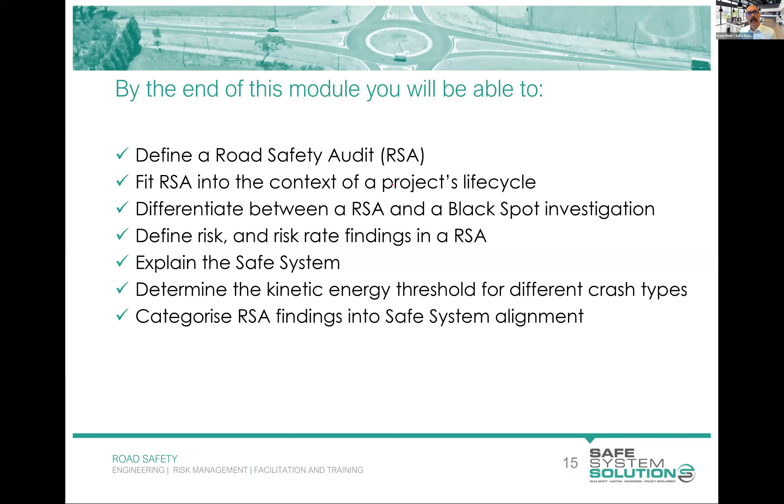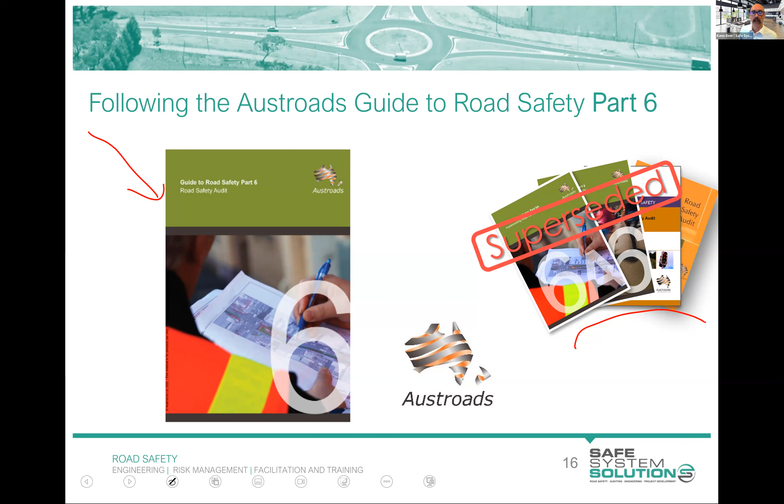I've just come back from Canada, where I was running this training course for the Canadians, and we're very much following the same process across North America, Europe, Middle East, Australia, and Asia. So it's fairly consistent. But overall, for the course as a whole, we are looking at the process of road safety auditing.

Okay, there's no possible way in our 5 modules we can talk about all of the things out there on the roads and the streets that you might identify that you've got a concern with as a road safety auditor. We just simply don't have enough time. And in fact, that's a lifelong, career-long exercise of continuing to learn and identify things and read things and see things and work with others. So we're going to focus in on the process of road safety auditing and ensure that you have basic skills in how to undertake this process of road safety auditing. We're going to ensure that you look at things through a safe system lens. I'll explain what that means shortly.

But then we're going to present examples of common issues in road safety auditing. And this is through my 20 plus years of road safety auditing and colleagues and things that we see coming up over and over again. Now, admittedly, we've managed to do some good work in changing standards and guidelines and the like to rectify these. If you're seeing the same thing coming up over and over again, you'd want to try to change industry on that. But there are common things, common themes that come up. So I'll use lots of those examples.

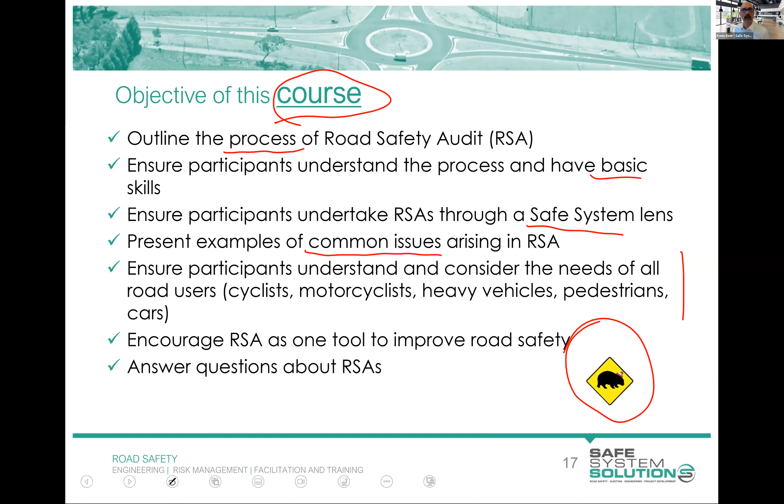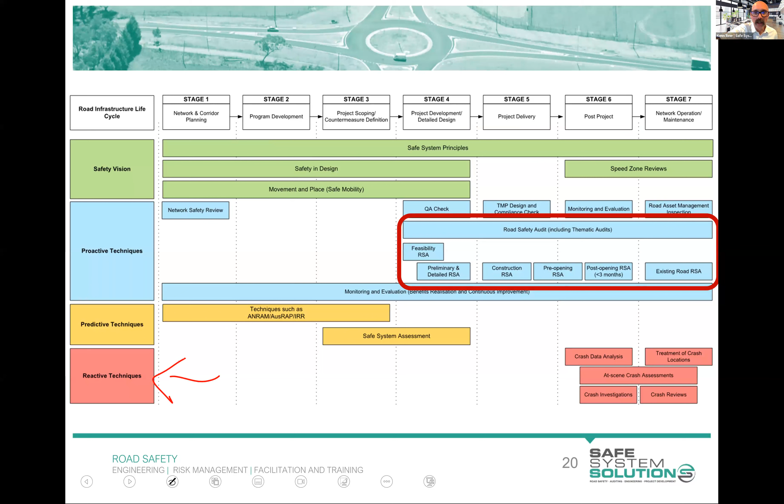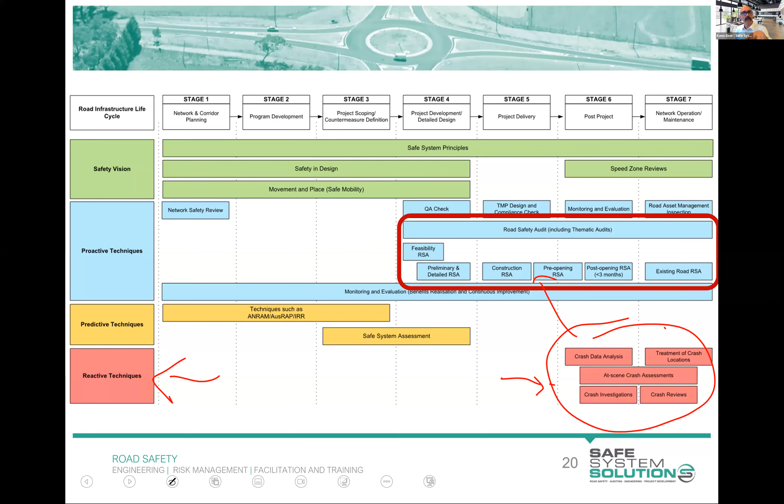If you've got a crash history and you're really doing in-depth analysis of the crashes that have happened and why they've happened, you're down here in reactive techniques and you're doing either black spot investigations or treatment of crash locations, these sort of things. Now, these are complementary to this. And in fact, we learned a lot of the things as an industry in road safety auditing from crash analysis, but those are two different beasts in their own right. I'll explain that a little bit more, but that's a common misconception of road safety auditing, that we're just looking at the crashes that have happened and trying to change the road environment based on the crashes.

Another common misunderstanding of road safety audits is to think that it is a check against the standards and guidelines. And that's not the case. So meeting all of the standards and guidelines of your jurisdiction does not guarantee safety. And there's many reasons for that. Sometimes the standards and guidelines are very old and they haven't kept up to date with current vehicle fleets, the way the roads are being used.

Second one is that standards and guidelines very often have traded off safety. They have to. They've got all sorts of things going on in the development of a standard or a guideline. They're thinking about cost and they're thinking about movement of vehicles, so the operation of your network. And sometimes safety hasn't got the prominence we wanted it to have. Then we've got the application of the standards in particular contexts. Sometimes a standard has never been thought about in a particular context, but it's being applied in that context. And another one is that sometimes standards combined create unsafe scenarios. On their own, they're fine, but you pull them together and it creates an unsafe situation.

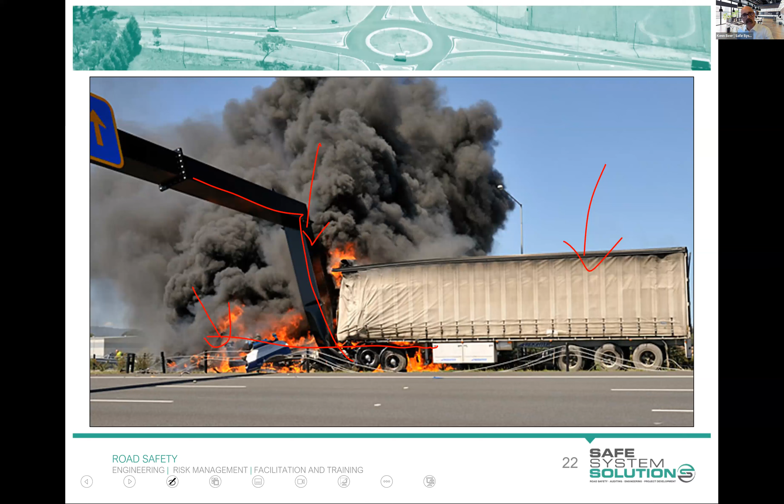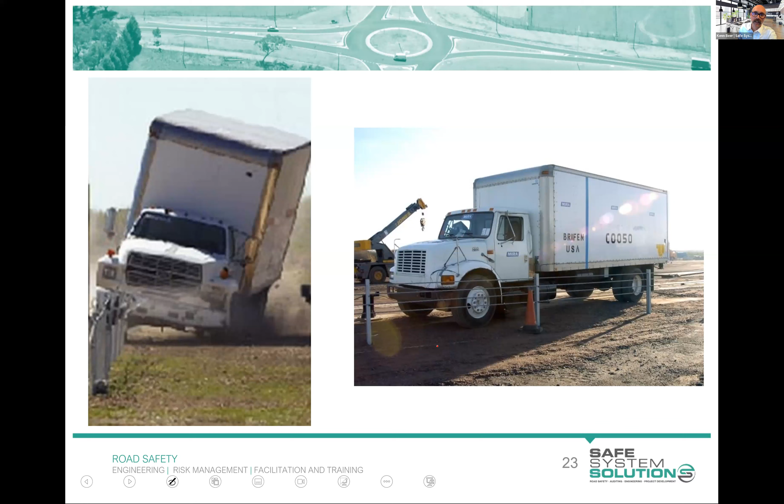So that is the test vehicle under a MASH test level 4 test, 10-ton truck, and the barrier needs to contain it, and there's a whole lot of other parameters in the MASH testing, the Manual for Assessing Safety Hardware. But that's for another course, a barriers course, in-depth stuff. As auditors, we want to know and think about this, and I'll integrate some of it in. But don't worry, you're not expected to be an absolute barrier expert in order to be a road safety auditor at this stage.

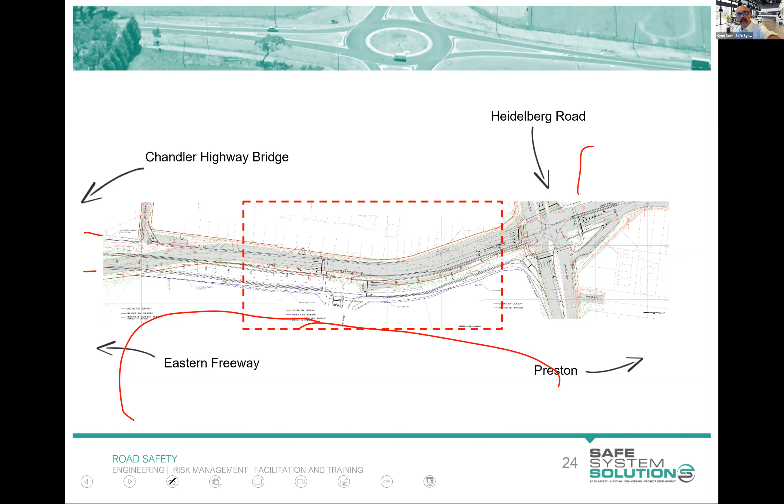Let me give another example, and I'm going to stick in Victoria here. This is a new bit of road that's being developed, a duplicated road. So they're duplicating it. And there's a big new subdivision in here, huge subdivision, massive lot of apartments, shopping center area. We've got an existing intersection up here, and I'm going to zoom in on this little bit that I've highlighted, okay? So this is a new road. It does not exist yet. Well, it actually does now, but back then when it was a plan, it didn't exist.

And you can see here, I've drawn a little car. So this car, imagine it's traveling along at 65 kilometers an hour. It's a 60 zone, but they're traveling a little faster, as many people do. We need to be thinking and factoring that in. So they're in their lane, happily continuing on straight, and whoa, I'm in a right turn lane. Now, this is termed a trap lane.

Now, this is a common thing we'll pick up in road safety audits. I really would like to find out who coined the term trap lane, because I'll give them a prize. That's an awesome name for this, because it's exactly what happens. You're driving along and all of a sudden you're trapped. You don't want to turn, but your lane turned into a turn lane.

Now we absolutely know from mountains of data and evidence that we're going to see an increase in rear end and sideswipe crashes in this location, because people are going to try and get out of that lane. They don't want to be there, and they're going to make that last minute move, and there'll be vehicles banking up.

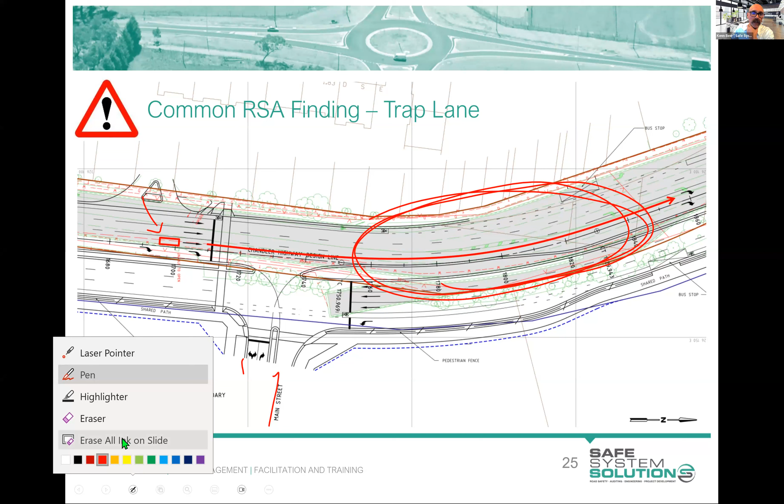So then you can provide recommendations, everything from removing the trap lane, which is what we want to do, but potentially providing them with other things that may lessen the risk if they absolutely have to keep it, such as some really good advanced warning, alterations in the pavement markings, could be gantry signage, all sorts of ways to try to lessen this risk if they can't remove it.

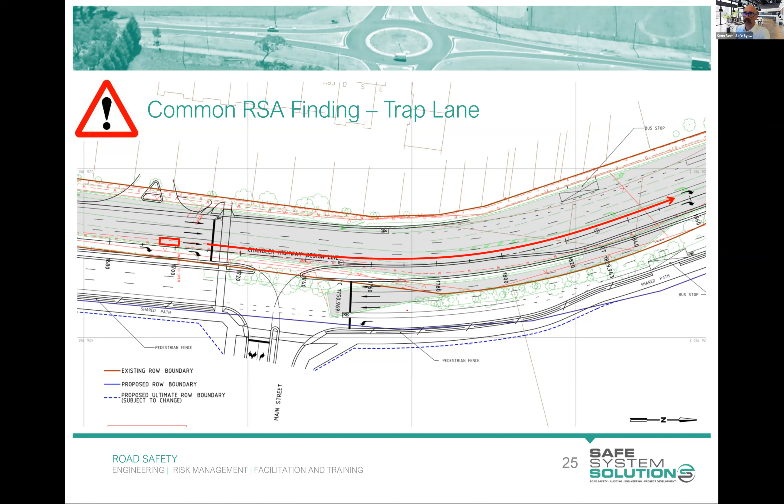But I'm going to get you to do a little bit of something now. I'm going to play this little bit of dash cam footage, and there's going to be a crash. Now, remember, road safety auditing is not crash investigation, but there's stuff we can learn from crashes to try to make sure people don't build them in the future, or if there are intersections like this, that maybe we can lessen the risk. What I want you to do is watch this a few times, and then type into the chat what factors in the built road environment here, in the infrastructure, may have contributed to this crash happening. Don't talk about the driver's behavior, all right? Talk about the infrastructure and how everything's been designed and built, okay?

So I'm going to play this video. Hopefully it plays. No, it's not going to play. We'll try it that way. Okay. I'm going to come back to this, and we'll do this little exercise after the break because something's gone a little astray there. Unless, Loretta, you have the slides up. You probably don't. Don't worry about it. We will come back to this.

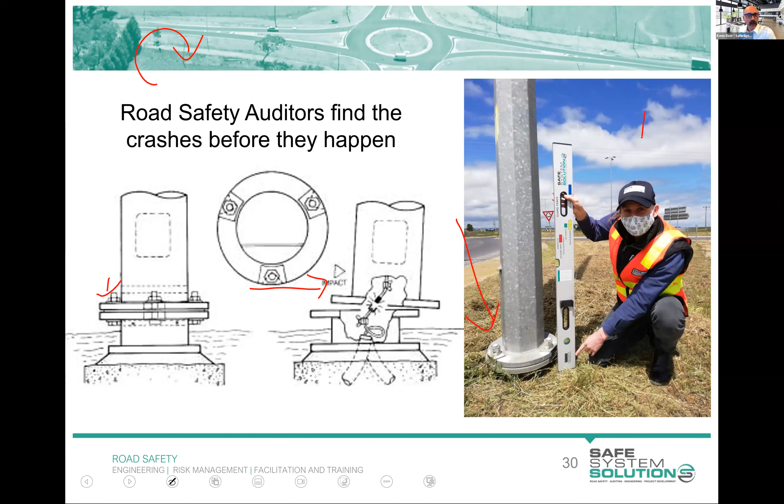Now, as road safety, so you can see one here, and you can see one of our senior road safety auditors having a look at it, which I'll come back to. But as a road safety auditor, you might be given a design like this, which is planning to put in some new lighting at this intersection. And what your role would be is to have a look at the lighting and whether it's going to cause any issues, any see-through effects, any changes to or get in people's eyes, like a driver will be blinded by things.

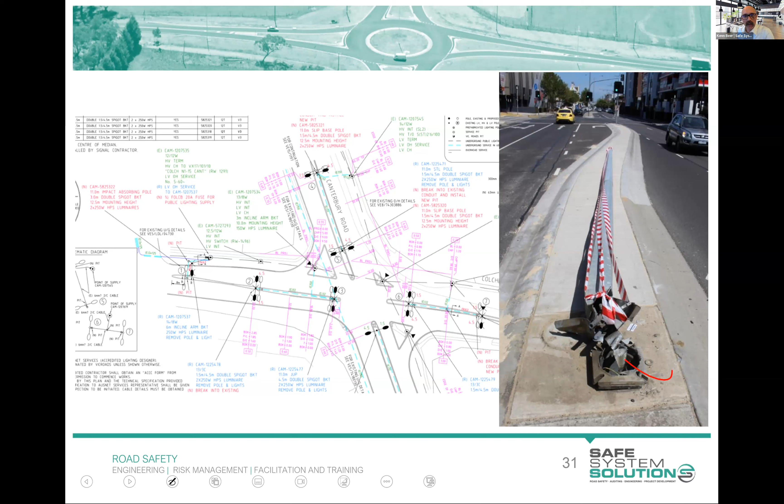You might be thinking about that, but you'd also be thinking about, well, what type of poles are they using, and are they appropriate? And that will be listed in the design. So you're imagining the future and saying, well, what are they going to build? And you can see there's a slip base pole that was struck, and I think it was struck onto the carriageway, and then it was pulled around onto the island there while waiting to be fixed.

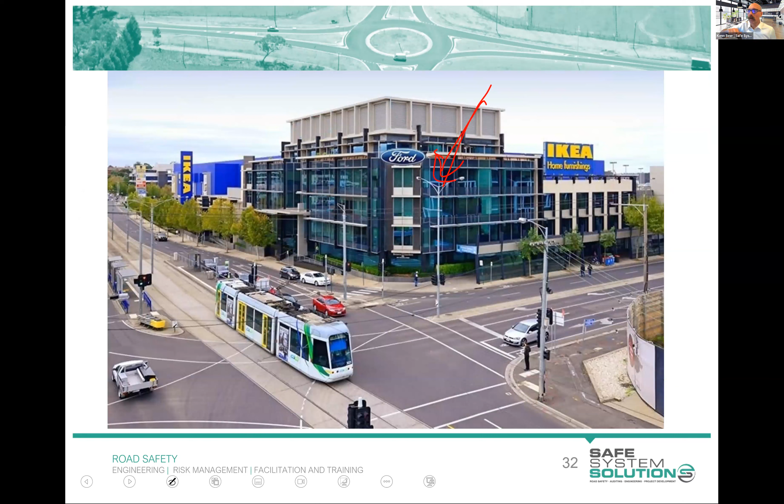But let's imagine if we had the design of this intersection here. And you saw in the design, they were planning to make that one a slip base pole. Okay. They said, yep, we're going to make that a slip base pole. What do you think, and put it into the chat, maybe some of the issues if that was a slip base pole? Give it a second here. Okay, here we go.

Fall on the tram tracks, power lines, VRUs on footpath, other vehicles, tram lines, pole. Okay, this is good. We're beautifully now thinking about it falling onto different places, and that's important. Our big concerns usually on falling light poles and the like is predominantly around pedestrian areas and overhead power lines and tram lines and the like. Falling onto other vehicles, we do think about. They're usually not heavy enough to bash through, but it's not something we ideally like, that's for sure. So that's another one to have a think about.

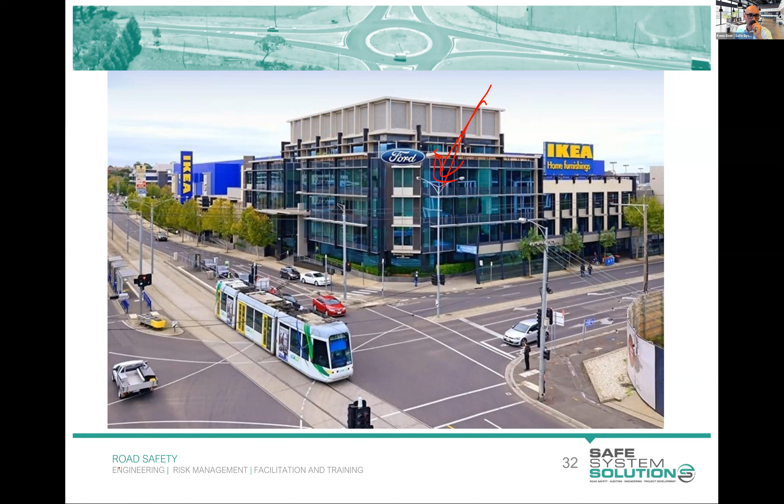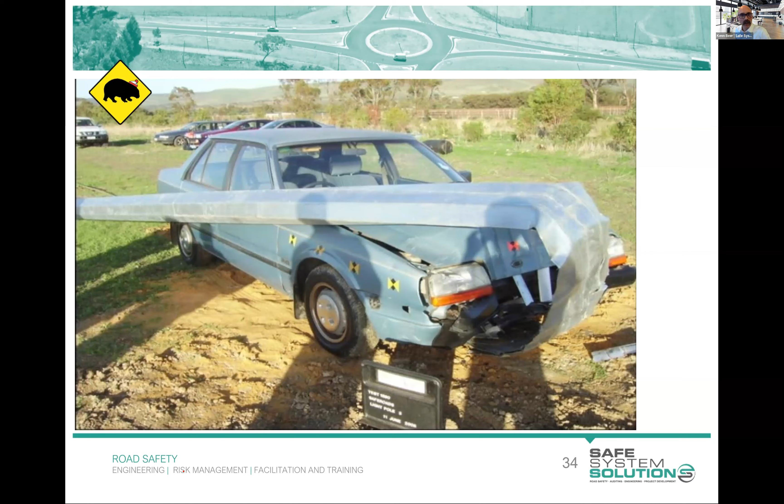But our role as a road safety auditor is to really think, okay, if we've got the design, where are these going to fall? Should they be frangible poles? Should they be slip-based? Should they be impact-absorbing poles? And where will they fall?

Now, in the PDFs of the slides for this course, which you get from the learning management system if you want to, you'll see some of these little "click here for a safe system snippet" links. That's just a little bit more information if you want to delve into it and have a look at it. We've usually got some videos of vehicles crashing into slip-base poles or whatever topic we're talking about. So you can have a look at that.

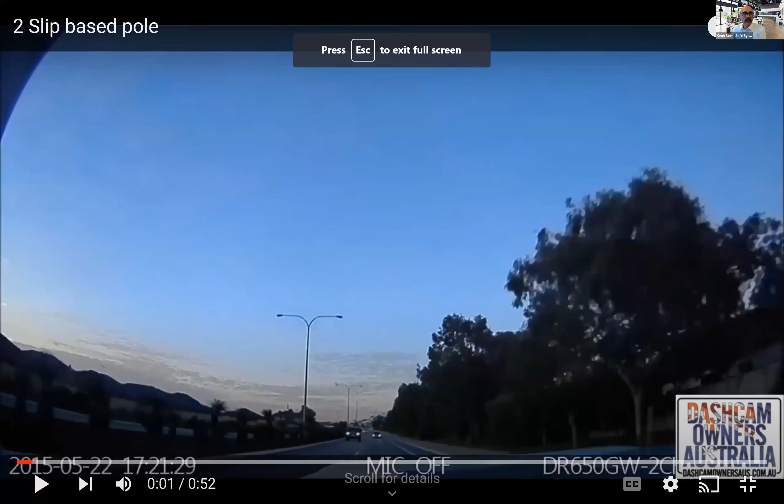Now, Loretta has kindly passed on to me the video. So I'm going to drag this in here. So hopefully, Loretta, now you're seeing the video?

Yes. Okay. I'm going to play this, and I want you thinking about characteristics of the road environment that may have contributed to this crash happening. And I'll play it a few times. So we're seeing the back of the dash cam here, and then we'll jump to the forward dash cam in a second. So keep it to the characteristics of the road environment.

Okay, I'm going to play it again, and I'm seeing some ideas come in. So what are the characteristics of the road environment? The design, the layout of this intersection, the signs, the lines, any other things you can think about, pop them in, and we'll have a chat about those. So we've talked about the frangibility of the pole already.

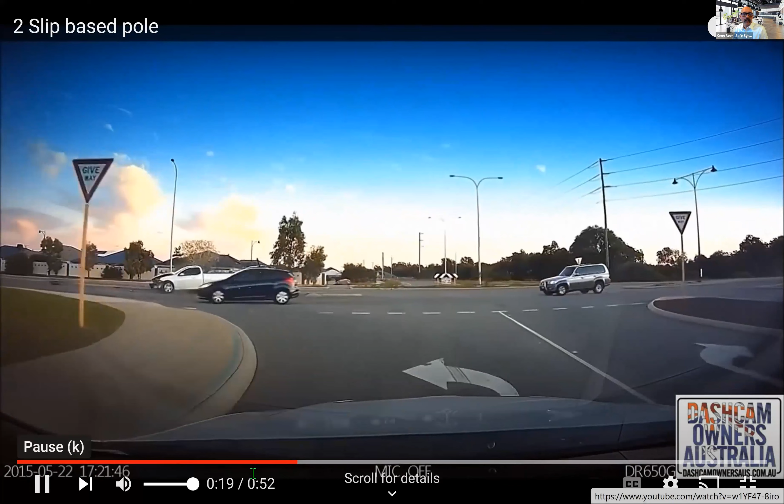Okay, so I'm seeing lots of good stuff come in here. This is excellent. Let me just start to have a look at what we're saying here. Okay. So we've got some people talking about, is there appropriate advance warning signage that there is an intersection coming up? And that's good. We want to make sure people are very alert to what they're approaching and what they have to do.

There seems to be a bit of confusion as to what intersection form this is. Is this a roundabout? Is it not? It's not a roundabout, actually. But if you're confused by that, odds on some drivers will be as well. Always hard to do any of this from a video like this. You want to be out on the site and really feel it yourself. And that's why part of road safety auditing is that we always go to the site.

But what we've got there now, people are talking about the location of give way signs. Where is it located? Is it hidden by other signs? That's another good one. Donnie has popped in there see-through effect. I'm going to give Donnie a prize there. The see-through effect is an interesting one, and that's the idea that this vehicle may have thought the road continued on unabated, that they didn't have to give way.

What are some of the contributing factors in the road environment that may influence the chance of a crash? And then we talked about the hitting of poles. Well, that's how bad the crash will be as an outcome. Is this going to be a minor issue, or is it going to be a big issue? So thank you. And this is a great group, Loretta, in the sense that lots of input and lots of good ideas. And already I can see lots of people who are already thinking like road safety auditors, because all of the things I was seeing in there are things you would want to be considering as an auditor if you saw an intersection that has that potential see-through effect.

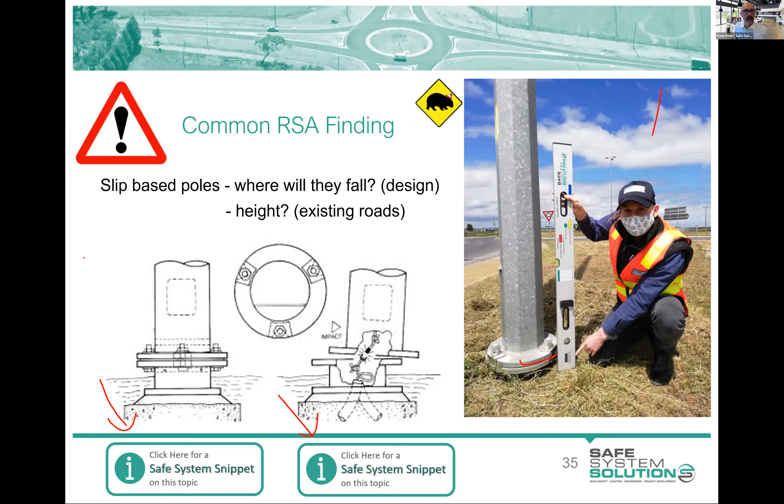So road safety audits are proactive. I mentioned this before. Black spot investigation or crash investigation is what we would term the reactive idea. If you've got an area with lots of crashes, you'd probably do a black spot investigation. Should you look at the crash history as part of a road safety audit? It's up to you. Austroads says it could be useful, it may not, but don't let crash history of a site drive a road safety audit. It may give you some factors, some things to think about, understanding of some of the road users involved, but if you're driving everything based on crash history, it's actually not a road safety audit.

Now, road safety audits are super good value if you took a benefit cost ratio. The way that's worked out is basically how many lives can we save, and we can put a dollar figure to that, and how much does it cost to do the audit and make any changes that are recommended. So for every dollar invested, you get $36 in return if you do an audit of a design. So it hasn't been built yet, but you're looking at the design and you're suggesting changes to make it safer.

If the road exists, it's been built, and you go out and do an audit of an existing road, it gives a benefit cost ratio of 6 to 1. So for every dollar invested, you get $6 in return. Now, a quick prize for somebody who can tell me why we get so much more for design stage than existing conditions. Pop that into the chat.

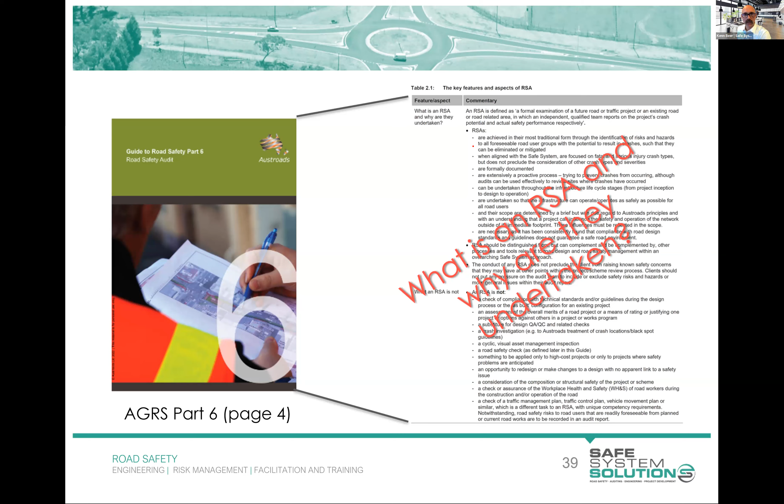But here's a really important little part of this. It's a formal examination of a future road or traffic project or an existing road or road-related area in which an independent qualified team reports on the project's crash potential and actual safety performance, respectively. So some key words there. This is a formal process, and I'm going to give you 10 steps that you have to do as part of a road safety audit.

You can do it for designs, so things that don't actually exist yet, they're planning it, they've designed something, or you can do it for the existing intersection or length of road, or like a cycleway, cycle path, or anything that interacts or is a road-related area. A car park can have a road safety audit done on it. You need to be independent. You cannot audit your own design. You cannot audit the project that you're the project manager of. You need to be independent of this.

Why is that? Well, you can't proofread your own letter, is another way you could think about it. You just miss stuff. Also, as I talked about, it's very hard, and you've got so many competing demands in these projects that you may consciously or subconsciously, as the designer, be trading things off in an audit. So we don't let that happen. You have to be independent.

You've got to be qualified, and that changes jurisdiction by jurisdiction, but you really have to have successfully completed a course like this, or one of the others that's accepted in jurisdictions. And then there's usually some other requirements of a team. And you're thinking about crash potential. So what could cause crashes? What could cause harm to our community if they build it the way they're saying?

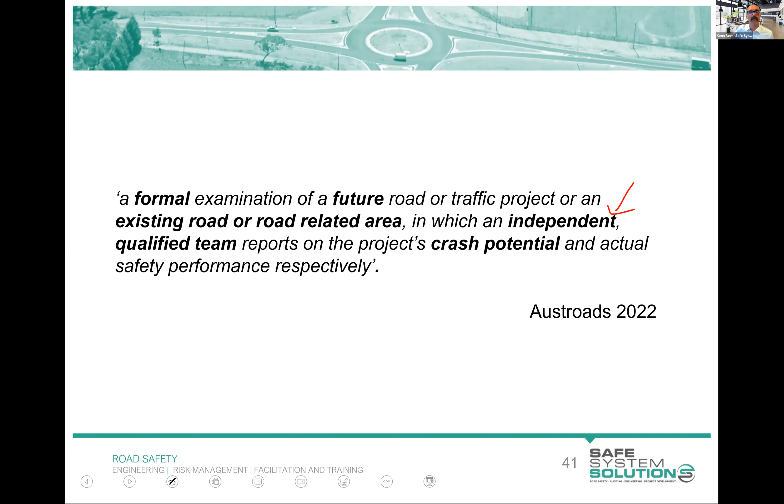But in here, we talk about shared responsibility as a principle. Now, what this means is that we can no longer blame a driver for all of the human things that they do. And we just see it all the time. People doing reckless things, people falling asleep, people not concentrating, all of that happening out there. We cannot just simply wash our hands and say, hey, the driver or the rider or the walker, it's their fault and they should not have done that, right? We can't do that anymore, right?

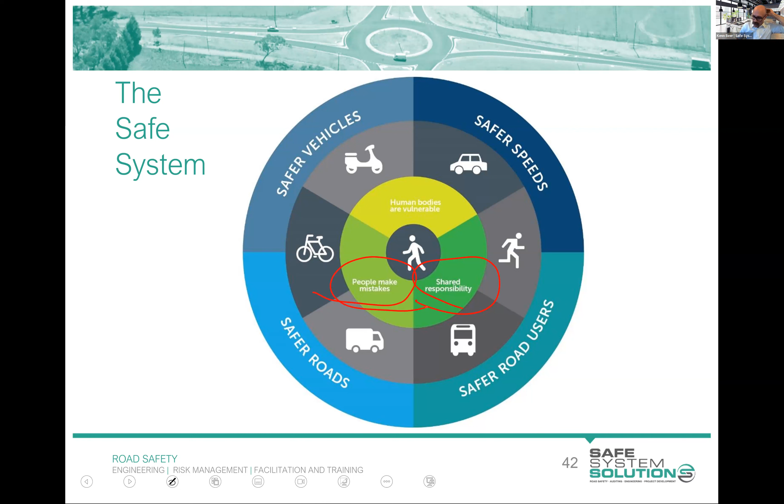We have to say, what could we have done within our realm of responsibility that could have lessened the chance of this or lessened the injury outcomes of a human making mistakes? Because that is a key principle, that humans will make mistakes. They will fall asleep. They will turn around and look at their kid in the back seat who's fighting with the other kid or has just thrown up. They will drop their coffee in their lap. All sorts of things are going to go wrong out there, all right?

Are there things we can do in the built road environment to lessen that risk? And then we want to bring this back to the biomechanics of the human body. How much force can the human body handle before it breaks, right? So what speeds can we crash at in different crash types and have a bit of confidence that those involved will walk away or just have minor injuries and recover quite quickly?

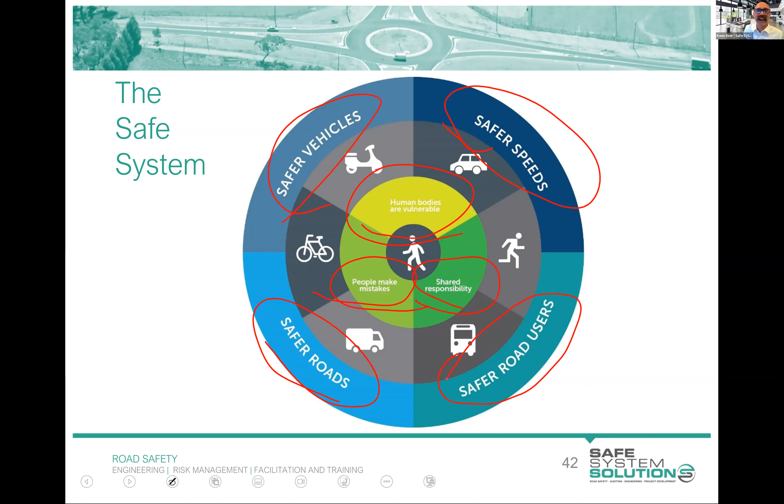Now, we absolutely recognize that, looking after the roads and the speeds, we are elements of this system where we can influence safety. We know that the vehicles can play a big role. We know that the road users can continue to play a role in safety. And we don't ignore that, but we recognize that there are things that we can do in the built road environment.

So key principles of the safe system: we have an aspiration of no death or serious injury. We know it's not going to happen tomorrow or next year, but we've got to get our mindset in that it's unacceptable for people to be killed or seriously injured going about their daily business of travel. And there's a lot of things that we can do in the built environment that can lessen the chance of this significantly.

We acknowledge people will make mistakes. Humans use this. Humans make decisions in this network. Humans operate this network, and humans fail. We have a shared responsibility, and we understand the vulnerability of the human body from a biomechanics perspective, and we design in accordance with that, which I'll talk to you a little bit about shortly.

But what I'm going to do is give you a 5-minute break now, but I'm going to get you to do a little quiz. Now, remember, you're not being marked on this. It's going to pop up on your screen unless your firewall blocks it. But it's multiple choice. Have a guess at it. Within the 5 minutes, you're going to have a stretch, answer these questions, and then we're going to get going again in 4 minutes and 50 seconds. So hopefully the poll's popped up. Remember, you're not being marked on it. Just have a go through it, and we'll get back into it shortly.

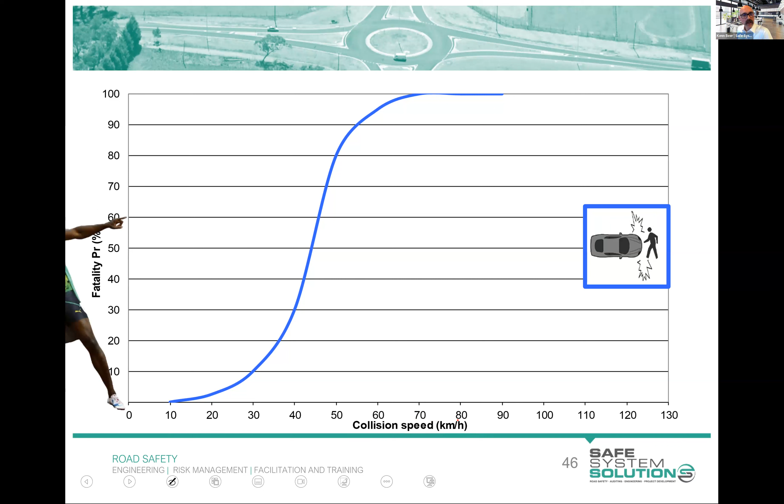There's been a massive scatter of these to come up with this curve. This is the curve, right? So you can see down here at like 10, 20, 30, most of our community is going to survive in those strikes. Up around 60, 70, or 80 kilometers, most of our community is going to be killed in that strike. Okay, so there's the great man. He comes in quite high up in his maximum running speed. But this is for all of the community.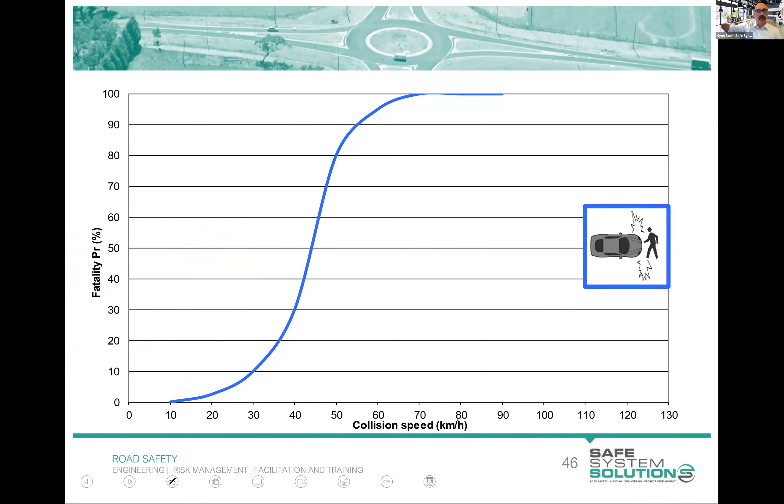But we've got this information for other road users. Oh no, that video's, sorry. We've got this information for other road users here, right? So in this crash, we've got the bullet vehicle, and that's the target vehicle. The bullet vehicle is the one that does the damage in a crash, right? So the target vehicle is the one who's going to get the injury.

So the driver or passenger, if being struck on this side, the bullet vehicle speed is represented down here. So 30, 40, 50 kilometers an hour on bullet vehicle speed, generally survivable for the occupant of the target vehicle. And the bullet vehicle will be fine because they spread the load across a bigger area. Up around 70, 80 kilometers, it's highly likely that it's going to result in death to the target vehicle occupant.

If we look at head-on crashes, we see that 60, 70 kilometers an hour is generally survivable for the occupant of the target vehicle. And in a head-on crash, they're both bullet and both target vehicles, all right? And up at that sort of 100, 110, it's not likely to be survivable.

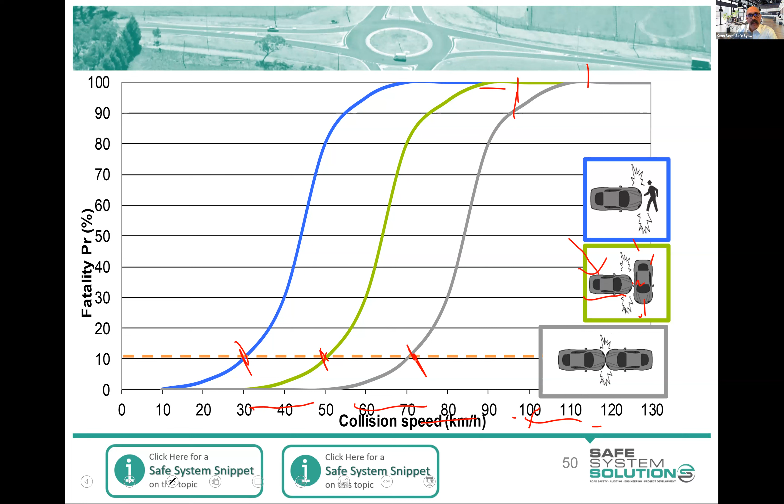And they become really important numbers within our safe system. So 30 kilometers an hour for pedestrian strikes, 50 kilometers per hour for this side impact right angle crash, and around 70 kilometers per hour for the head-on crash. Now, they're what we refer to generally as safe system threshold speeds for those crash types. So you'll be factoring this into your audit a little bit because you're going to be predicting a crash.

You're going to say, well, I'm worried that somebody is going to step out here from that bar and get struck by a vehicle. What speed am I predicting that that's going to happen at? Is it going to happen at 10 kilometers an hour where I go, well, we don't want that to happen, but it's likely to be survivable? Or is that going to happen at 60 kilometers an hour where we say, actually, you know what? When that happens, it's not going to be survivable for the pedestrian.

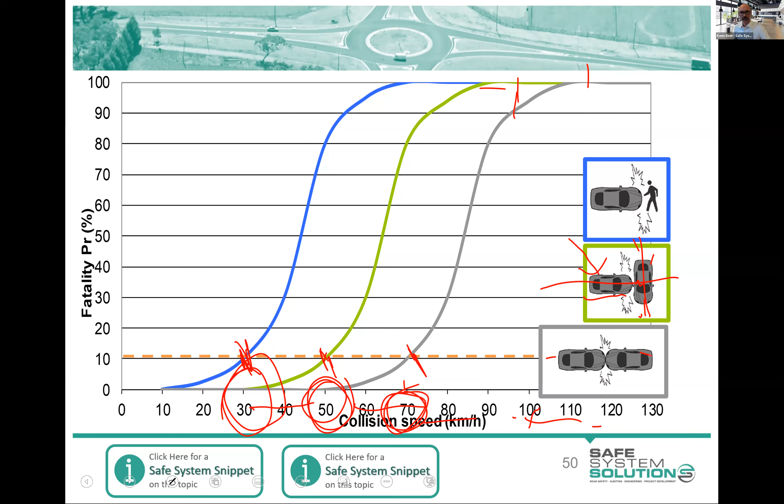Okay, so let's get back in and start talking about this process of road safety auditing. We used to just say, okay, what's the issue? How bad is it in terms of what risk rating are we going to give it, and make some recommendations on things that could be done to lessen that. Under the new model, we still find our issues and we still give them a risk rating, but we consider those safe system tolerances that I've just taken you through, the forces, and we make recommendations, and then

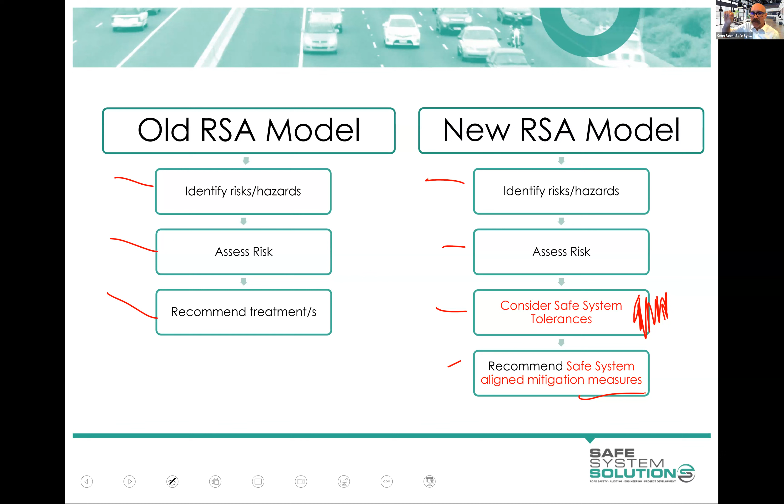we just give an indication of how well that recommendation is going to go in safe system alignment, or really addressing the issue. Or are we just giving a little bit of improvement, or are we getting substantial improvement in the safety? And I think the easiest way for me to do this is to just take you through an example of an audit finding, so you see how this plays out.

So here is a design for a new intersection. Okay, this intersection does not exist. There's a road there. It's a high-speed road, an 80-kilometer-hour road, I think. And they're planning this new intersection. And you can see they've got a left turn lane there, got a right turn lane here. And of course, we drive on the left here. So we've got vehicles that'll go through there.

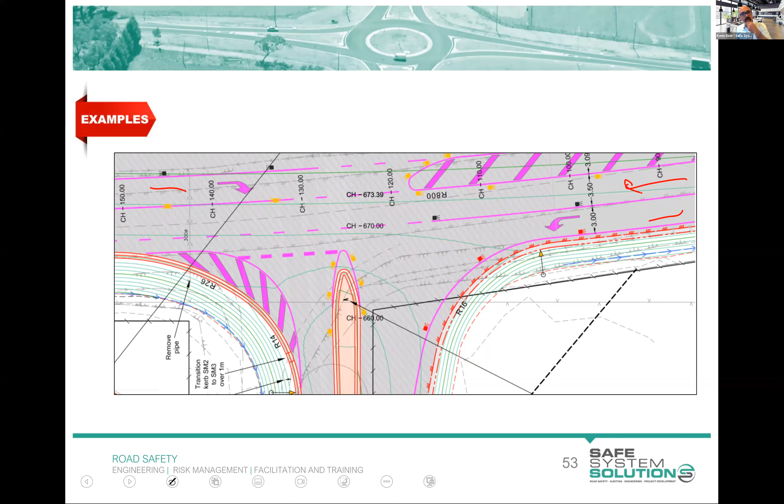So there will be a point where a vehicle will be turning left in that newly constructed left turn lane, and it's going to block the sight lines to another vehicle there. Does this meet standards and guidelines? Absolutely. This is very stock standard, unless you're in Queensland now, because Queensland's just said you can't do it in this arrangement anymore, but everybody else seems to be pretty okay to build this, even though we know we're creating

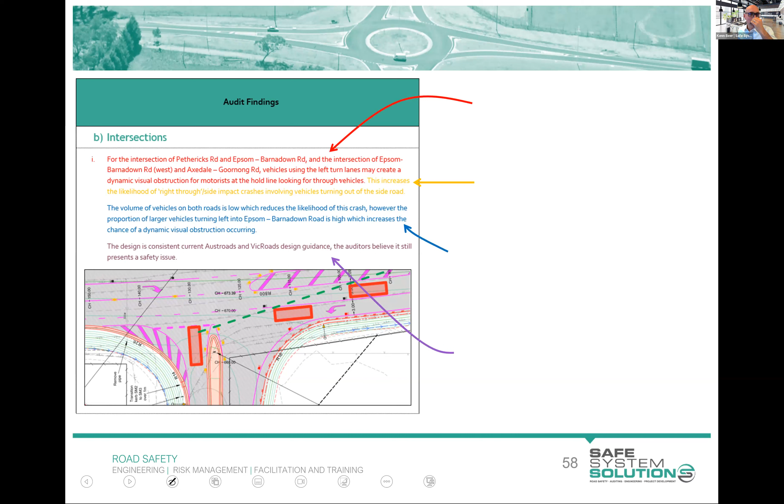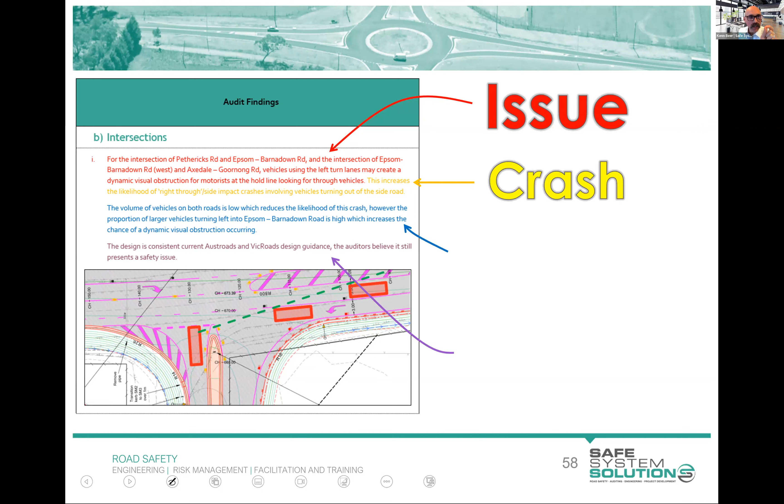So the way that goes is you describe the issue. So for this intersection, vehicles using the left turn lanes may create a dynamic visual obstruction for motorists at the hold line looking for through vehicles. So we've explained our concern. Then we actually say the crash. No matter how obvious it might be to you, say what the crash is. This increases the likelihood of right through side impact crashes involving vehicles turning out of the side road.

Then we say anything that could increase or decrease the risk of this. So the volume of vehicles on both roads is low, which reduces the likelihood of the crash. However, the proportion of larger vehicles turning left into Epsom – Barnadown Road is high, which increases the chance of dynamic visual obstruction occurring.

Then you can put a reference to any standards and guidelines if there are any applicable, and you are welcome to put nothing in here, right? You don't need to put this purple part in. But this one, this audit team said the design is consistent with current Austroads and VicRoads design guidance. The auditors believe it still presents a safety issue. So there you go. The audit team's actually putting it front and center and saying, hey, we know you've met standards and guidelines. Doesn't mean it's safe.

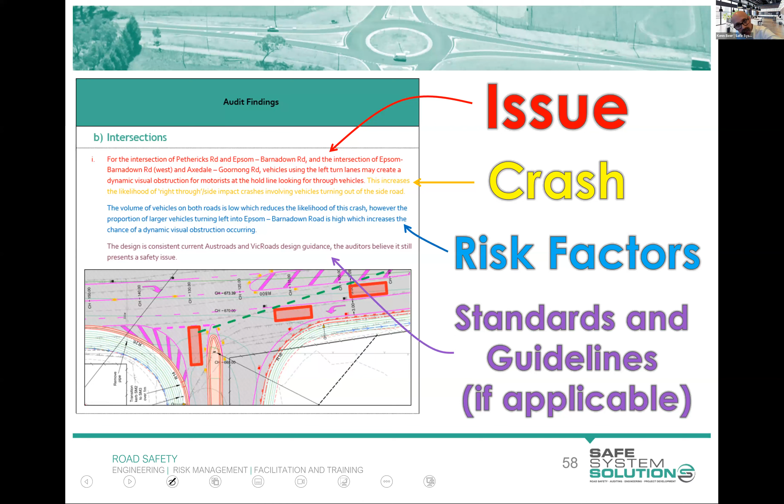So that's an audit finding, right? But we do a little bit more here. We actually then give a risk rating to this. Prize for the first person who can give me a formula for risk. And I'm talking the international definition of risk, financial risk, environmental risk, road safety risk. There is a formula we use for risk. Anybody got it? Anybody want to have a crack at that? Yeah, probability times consequence, likelihood times severity.

They're both correct. I'll let Loretta have the fun task of trying to work out who gets prizes because lots of people are in there.

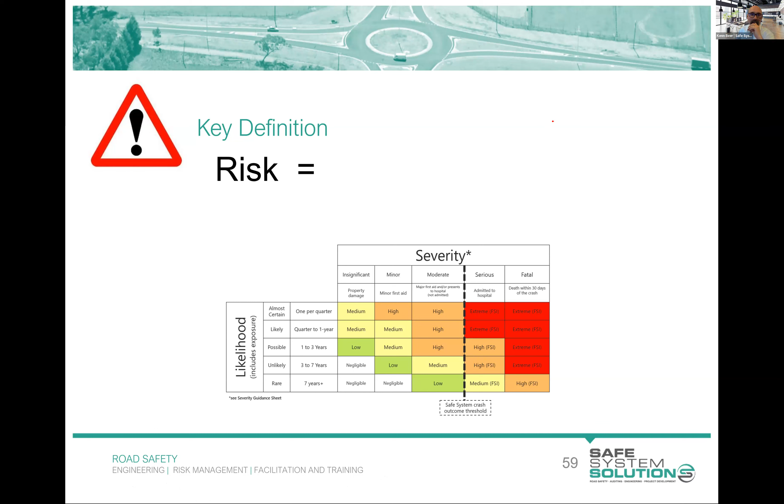And it is likelihood times severity or frequency times consequence, or it's basically saying, what is the chance a bad thing is going to happen? And when it does, what's the magnitude of badness? How bad is it actually going to be? So what's the risk of recession? Well, the risk of recession is based on the chance we go into a recession and how deep a recession we go into. That's a risk of recession. Actually, I think anyway, but that's the general idea.

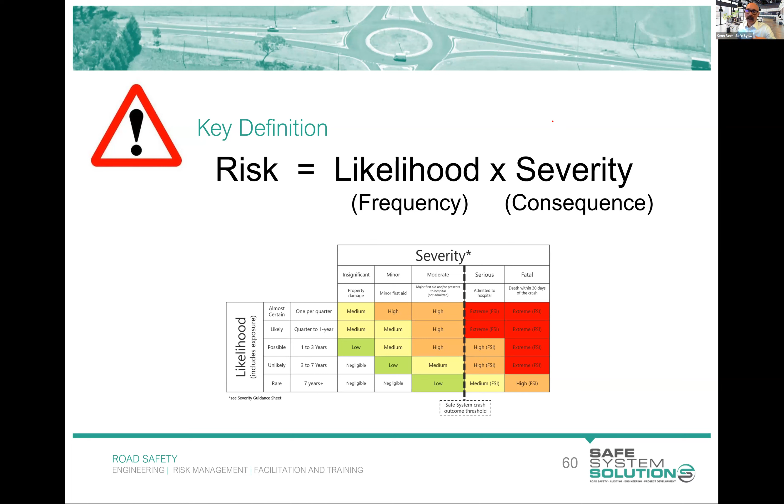For road crashes, we're talking about what's the chance of a crash, and then when the crash does happen, how severe is it going to be? And so we need to make a bit of a judgment on this in a road safety audit. And to do this, we use this risk matrix, and it's a fairly standard risk matrix, a 5x5, based on the likelihood of a crash. Everything from almost certain, so once a quarter we think this crash is going to happen, to rare, it's going to be once every 7 years or 10 years or so. And then when it does happen, we're thinking about, well, is this going to be minor first aid or insignificant, property damage only? Or are we talking about people being killed, and that's death within 30 days of the crash, right?

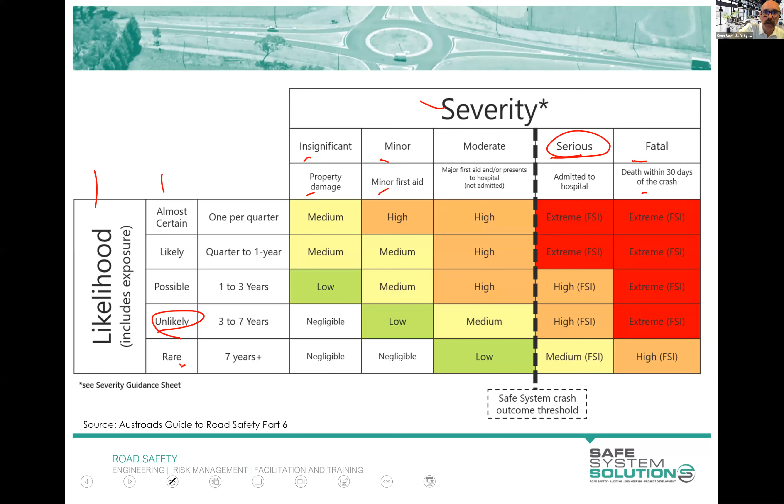And then you take that and you say, well, okay, we think this is going to be unlikely, but when it does occur, it's going to be serious. People are going to be admitted to hospital. We take that as a high, and then we annotate it also with FSI, which stands for fatal and serious injury. That's simply saying that, like for like, we are more worried about that high risk than we are that high risk. Because with this one, people are going to walk away or just get minor injury and recover to lead a normal, healthy life. With this one, they may be holding debilitating injuries for the rest of their life. So that's the only reason for that line and the FSI annotation that's been put in here.

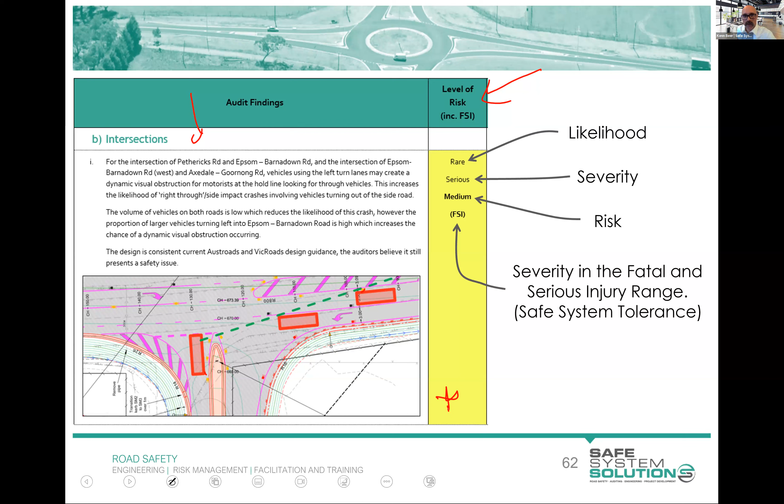So then in our audit finding, we say, right, we've identified the issue, we've nicely articulated it. Now we're going into what's the level of risk. And we say, maybe for this one, it's rare that crash is going to happen. Everything's got to line up there. Somebody's got to be turning, and then this driver has to make a bad call, and there has to be another one here, and all of that. But when it does happen, the speed and the angle and everything, it's going to be serious. So that's going to result in a medium risk, but it's FSI, meaning that it's rare that it's going to happen, but it's serious. So we think of it as a medium risk FSI. And I always like to color that cell in accordance with this. So, yellow for medium, red for extreme, and the like.

And then we need to say, okay, we've given you an issue, we've risk rated it. Now we're going to give you a little bit of help on how you might be able to lessen that risk. And as I talked to you before, we know some things are really effective, and we know other things are less effective, but still can help. And I want you to think about these as either primary treatments or supporting treatments.

Now, primary treatments, think of this as like a bucket. Okay, I'm going to put a handle on it, like a bag. All right, here's a bag of treatments. It's got roundabouts in there. It's got barrier systems. It's got raised crossings. It's got signs. It's got lines, right? You can pull things out of either of these buckets. Okay, but the primary ones are road planning, design, and management considerations that virtually eliminate the potential of fatal and serious injury occurring associated with foreseeable crash types.

Supporting are things that we know are good, so road planning, design, and management considerations that improve the overall level of safety, but are not expected to virtually eliminate. And what you see in this bucket is signs, lines, lighting, pavement, fixing pavement defects, improving skid resistance, all of these sorts of things that we know are good things to do, right? But they're still very heavily reliant on the human being alert and compliant and really,

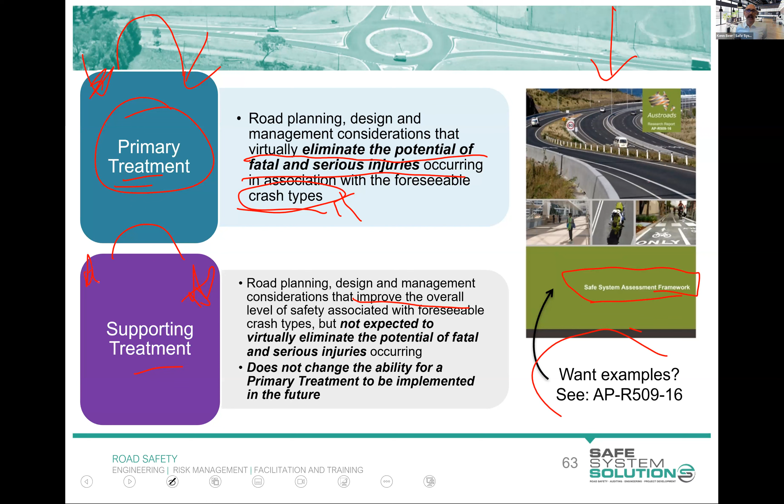Now, because this is a little bit confusing, I'm pointing you at another document. It's the Safe System Assessment Framework. This is not what we're covering in terms of this, but in there are examples of things that are primary treatments and things that are supporting treatments. And I'll come back and show you that at a later stage when we're getting you ready to go and do a practice road safety audit.

But you see there, then we make some recommendations, and they are just recommendations. We have no legislative power as road safety auditors. We cannot force anybody to do anything, right? But we can give them some advice and try and help them. So we say, implement measures to reduce the speed and or angle of impact at this location. This could be achieved with a roundabout, primary.

If this cannot be achieved, implement measures to improve the sight lines at this location, such as increasing the offset of the left turn lane, supporting, or relocating the hold line forward, provided that can be done so safely, also supporting. So you can see there, it's not necessary that we only provide one definitive, you must build a roundabout, because that's insane. This project team will be constrained by budget, by other things. We can't tell them that they have to build a roundabout.

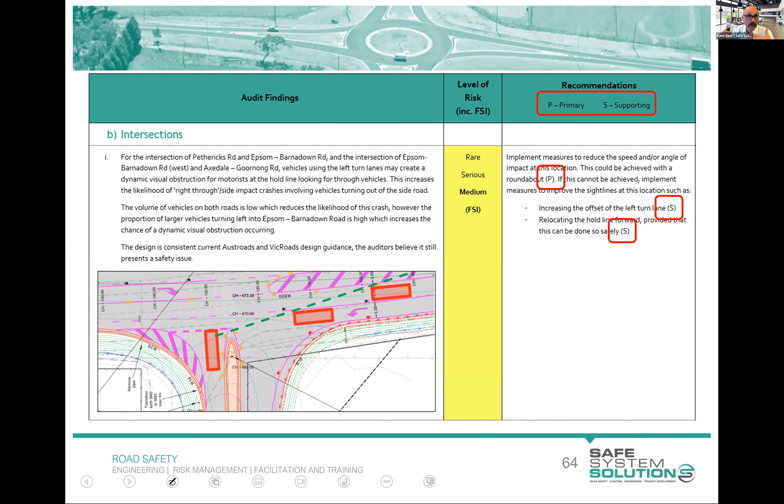We would love them to build a roundabout at this location that would really address the issue here. And there'd be a lot of wonderful safety benefits. But we're realistic. We go, okay, if you can't do that, here's some other ideas that are not as effective, but that might be all you can do.

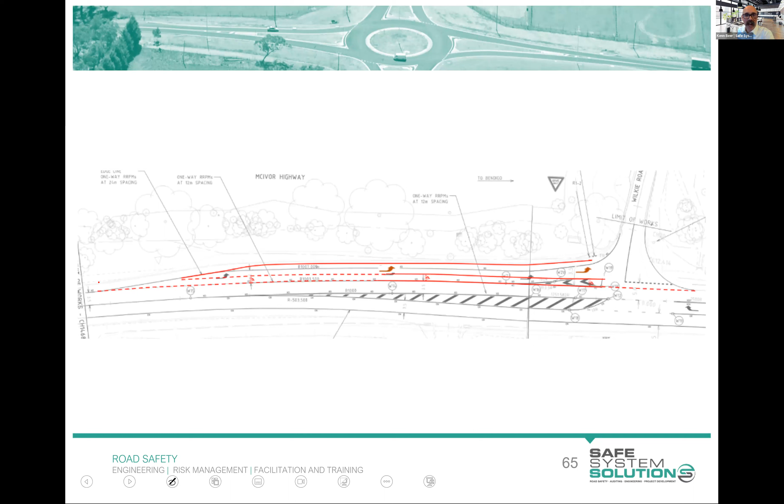I was part of an audit team recently. Same issue came up, building a left-hand lane, same as before. And this one, we actually suggested that they utilize a bike lane through there to offset and to open up sight lines, because it also connected with a deficiency in connectivity for bikes going through. So it was a nice little tweak. You don't, in a road safety audit, have to mock it up like this. In fact, that's going above and beyond, but you can provide them ideas.

And a little tip here is, to be categorized as a primary treatment, it's either got to address the consequence of the crash, or it's got to virtually eliminate the possibility, which is very hard to do in the sense that we've got to factor in human error.

Now, you're going to get lots of practice on this throughout this course. So if you're a little bit confused at the moment, don't get too concerned. We're going to go through this. You're going to have some practice at it, and it'll get better. But remember, primary treatments are big, great, really wonderful safety treatments that are going to virtually eliminate that. And others we refer to as supporting.

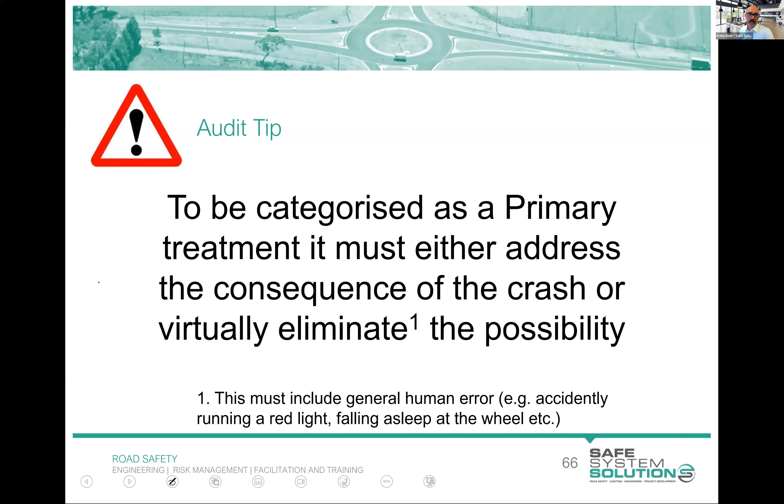And the last thing you do when you're writing up an audit finding is you leave this bit blank, which is to say that, hey, I'm giving you this report. Do something with it. All right? Write your comments, accept it, don't accept it. It's always left blank until it's handed over to whoever's receiving the report, and it's an area for them to make their comments on.

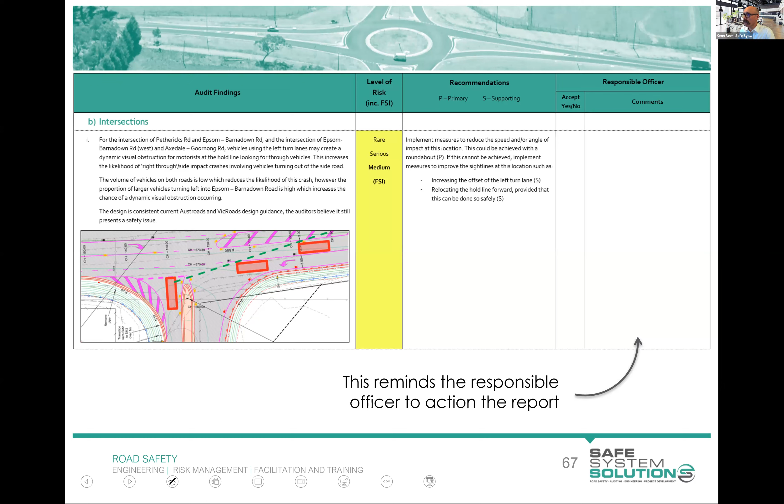So we're doing pretty well here, and I need to make sure I leave time for Loretta to give you a little assignment. It's nothing to be concerned about. It's just something to get you going.

So I'm going to just jump through this really quickly here, but this is another audit finding, just another example that you can have a look at. You can see immediately from the snip of the design what we're interested in. And that just shows you how wonderful it is to put that snip in. We can immediately see a 2.9 meter right turn lane. We're going to be tight. This is going to cause some challenges, right?

And then it goes through and it follows the formula there. I won't read it all out to you at this stage, but it's going to follow that formula of working through what is the issue, the crash, the risk factors, and then any standards and guidelines. And you can see here that this one actually says it doesn't conform to standards and guidelines because it should be a minimum of 3.3 meters.

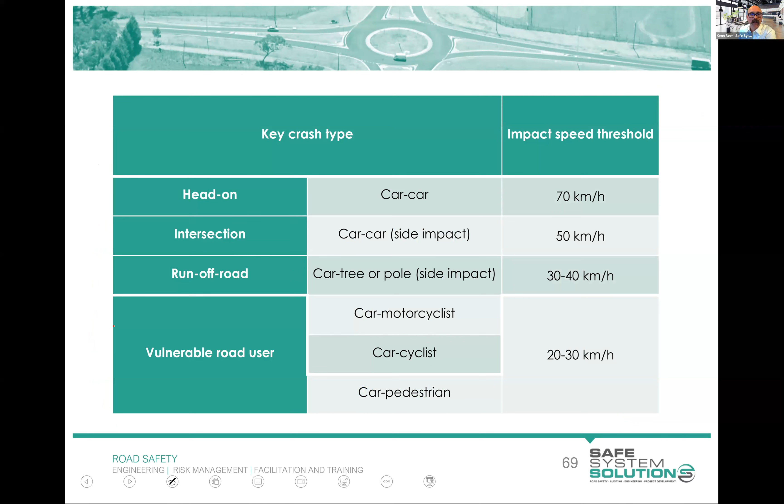And then you're thinking about the severity of the incident, going back to these sorts of diagrams, and you get your information there. So I'm going to jump through that. Oh, there it's been blown up, and a sneaky Wally got in there.

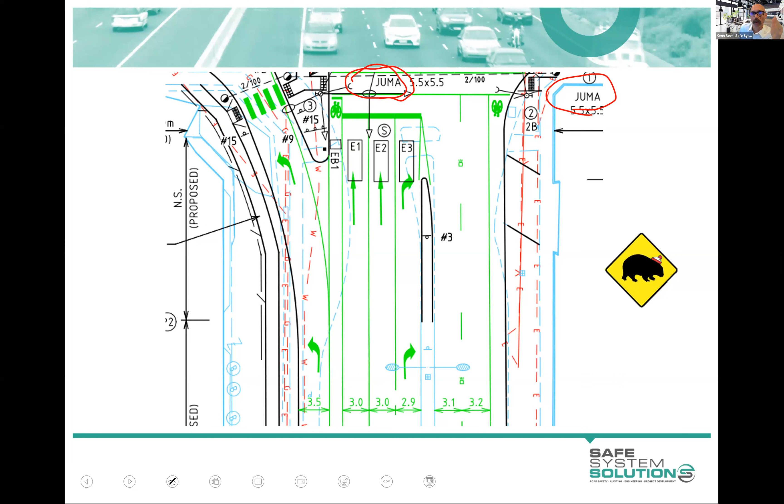While you're tracking that down, give a prize for the person who can tell me what JUMA stands for. There's another prize for you. Anybody got that? Yes. Callan in there. Joint use mast arm. That's basically where you put your traffic signals and your lighting on the one mast arm.

So poor examples of wording of that finding would be right turn bay is too narrow. Okay, which right turn bay? I don't know what you're talking about. Why is that even an issue? So many questions to be asked. Better would be this one, right turn bay from main to side road. At least we know where we're talking about now. Increases the potential for side swipe rear end. Okay, we've got a crash type, and Austroads says it should be 3.3. Okay, that's sort of done the job.

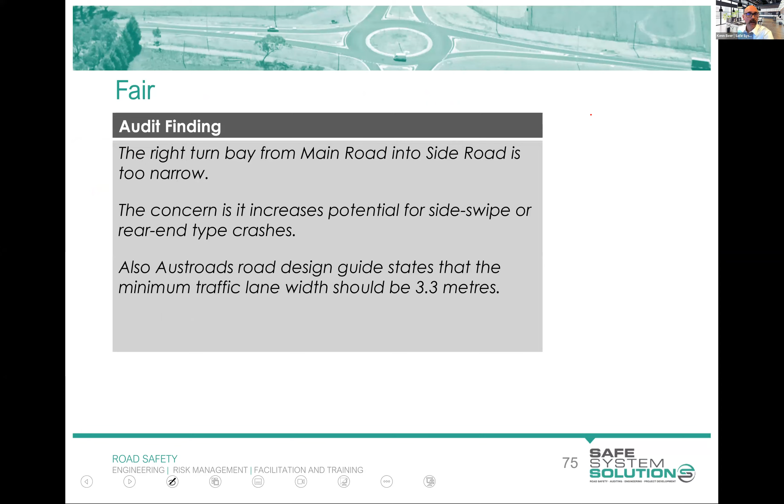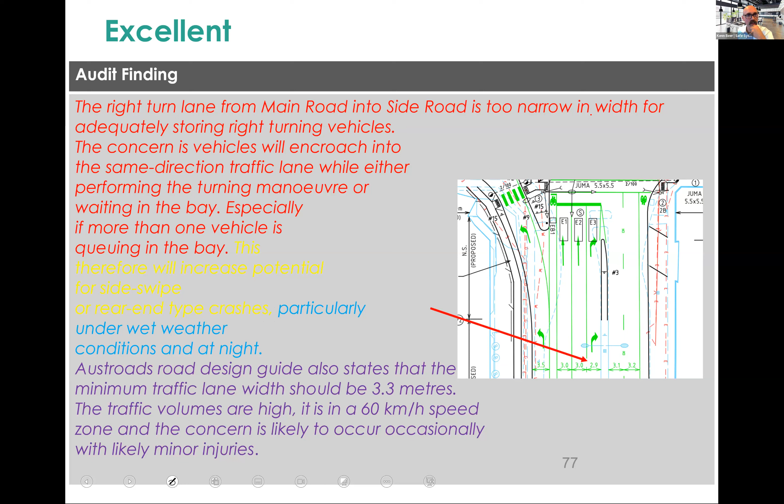But this is now where we're at, which we looked at before, and you can see there it's broken down by that recipe, that formula. Okay, it's got a snip. It's pointed us at that. This is a much more comprehensive audit finding, and I give this excellent. And if you're able to produce this sort of stuff in the audits that you're doing, or the audit you're doing as your assignment near the end of this course, you'll be getting high marks. Issue, crash, risk factors, standards and guidelines, if they're applicable.

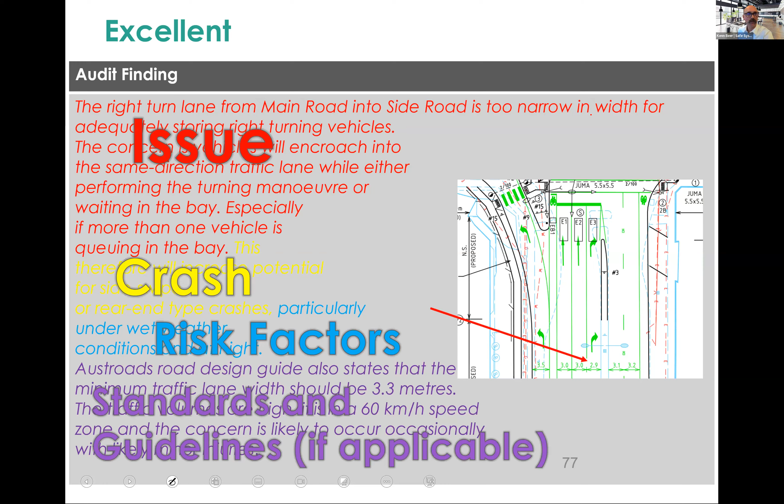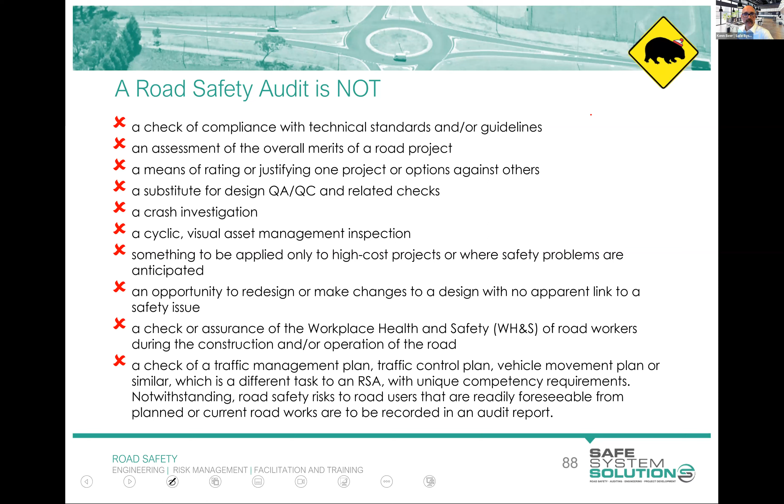That one, if you did notice people not wearing their high-vis vests and the like, you'd probably point it out, but it's not the core of the road safety audit. And then it's not like a check of the traffic management plan for conformance with the codes and those sort of things. But I'll talk about this a little bit later in that section.

As I mentioned before, road safety auditors are problem finders. That is our job. And I kind of feel like there's a lot of engineers and technical people who do auditing. Engineers are like problem solvers. And so you kind of got to extract that finding of the problem out from the solving it and do those in multiple parts.

Now, a question that came in before was around safe system assessments versus road safety audits, and there are lots and lots of different techniques to look at safety in a project, and they have overlapping parts, and I've put a few of them in there. But there's overlap between a safe system assessment and a road safety audit. That's a different technique. It's got other advantages and other things outside of it. We do a course on that one.

We are concentrating on the road safety audit, but I did want to show you some of this overlap between design reviews, which is where you hand your design over to the person who sits next to you and they redo your calculations and check things and the like. Well, there's a bit of that goes on in an audit as well. And then there's other things, safety in design, which is more thinking about the workplace health and safety. Can they build it safely? Can they manage it and maintain it safely? Can they decommission it safely?

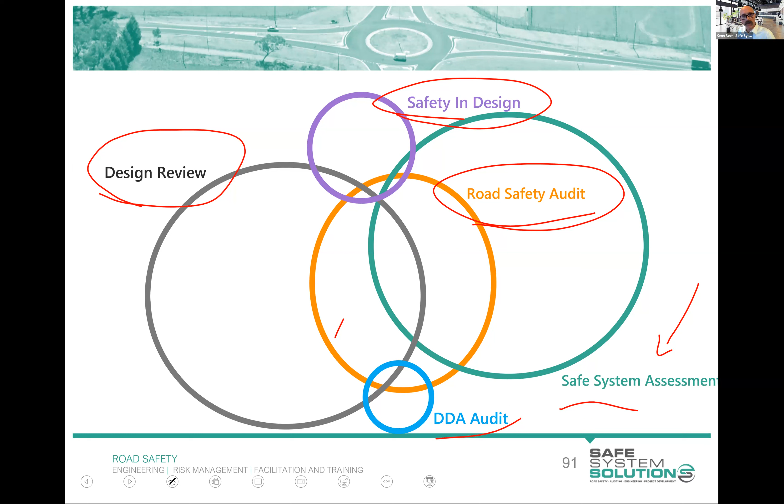And DDA, which is termed different things in different jurisdictions, but that's Disability Discrimination Act, or can everybody of different abilities use this facility? Is it wheelchair accessible? Can people with vision impairment use this facility? So there's overlap. Just wanted to show that.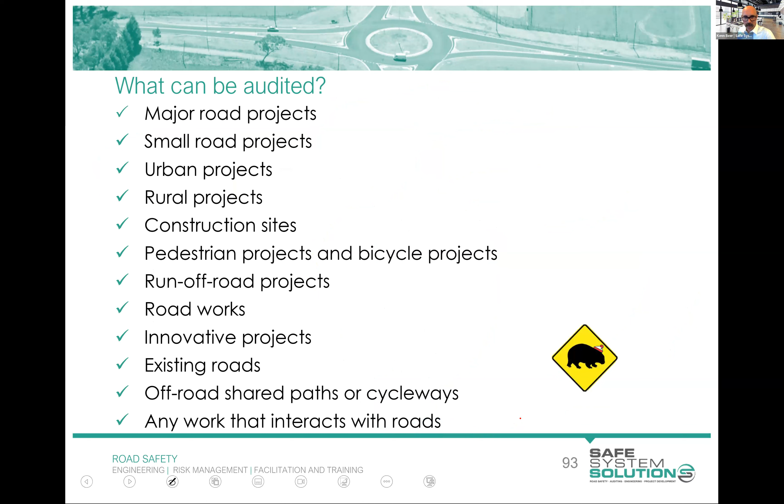But what can we audit? Well, you can audit pretty much anything that interacts with the road environment: big project, small, urban, rural, pedestrian, roadworks, innovative stuff, and then even the cycleways, car parks, that can all be subject to a road safety audit.

Now, I want to give this example. Here's an intersection. This road has priority, more major road, high speed. And you can see this road doesn't have priority. They approach this. This is an unsealed road. They've got a project where they're planning to seal the road. Simply formalize that road, seal it, do a bit of curb work here, you can see, and refresh the line marking. So they're improving it.

They're following all the standards and guidelines for sealing a road, and improvements are going to be made. So this council doing that sealing work and that formalisation elected not to undertake a road safety audit because they were just improving things and following all the design standards. Following that work, there was a significant increase in crashes. We saw quite a few members of our community killed and seriously injured as a result of these so-called improvements.

So we can see that somebody's already tried to solve, but I'm going to ask what the problem is, okay? Why did we see that increase in death and serious injury? I saw somebody's jumped straight to solutions, but now I want you to go back as an auditor and tell us what the issue is. Great. Okay. So we've got it coming in. See-through effect, continuity factor, the see-through.

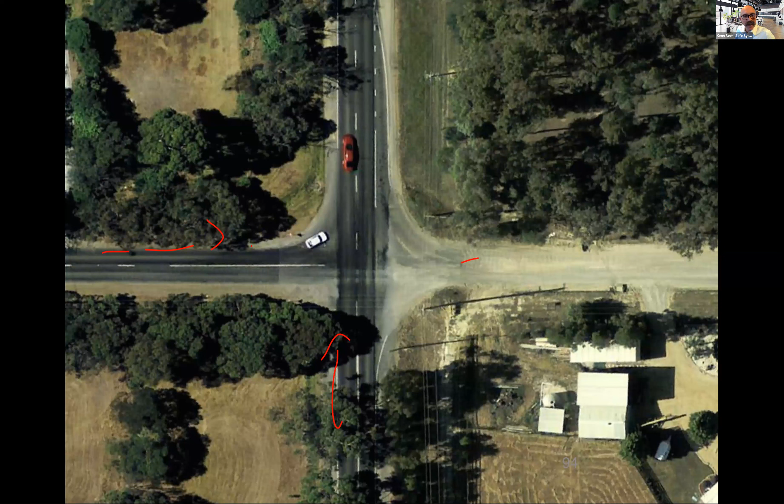Anybody who said see-through effect, continuity, anything like that. Because what's happened there is when we were back at this, vehicles approaching here could see this big change and they knew that something was coming up. When this was sealed, they approached from here and it just looked like the road went straight through because it continued on the same color, straight alignment.

So that's from the new side. Don't worry about the burnout marks. But that's from the old side. You can see it sort of continues straight. We've got a run of power poles, we've got a run of trees. Everything's just making people think that the road continues through. Okay, there's a couple of stop signs there to try to flag that, but people will miss that.

So there's an example of even when you think you're doing things just to improve the situation, if you're fundamentally changing parts of the road network, it needs to be subject to somebody looking at it or a team looking at it from an absolute safety perspective. And that's exactly what you did. It was wonderful to see how many people identified that, right?

If you could have got in there as a team before they did that work, we could have come up with ways that they could have lessened this risk, and we hopefully wouldn't have seen all those people killed and seriously injured at this location after they built it. And there are lots of things. We saw somebody there said stagger the intersection. Okay, that's one option, right? A staggered T is a good one.

Yeah, you just realign it a little bit out that way, and then you're looking at a hazard board there, so you're not going to have a see-through, and then you make that turn to go. Make sure you stagger it that way. Don't stagger it that way. That's bad because people sort of prop out in the road. It's a mess. But anyway, that's one option. I mean, other options, there's lots of them.

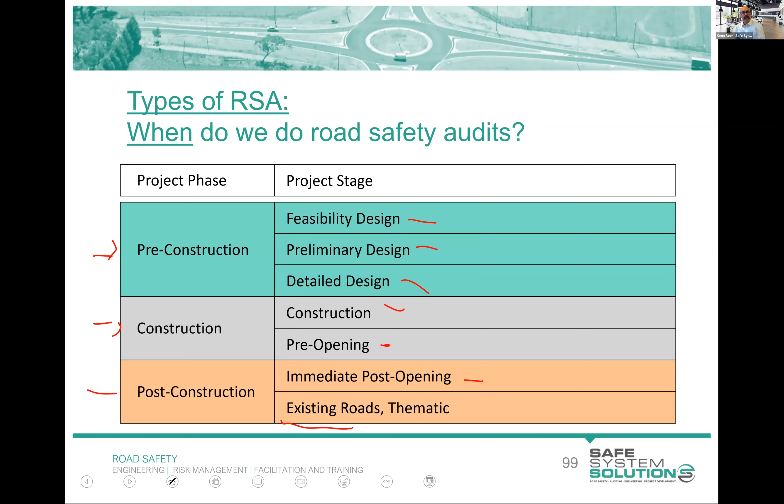And so feasibility audits are, I call them the planning audits, basically. Like, we're at an early stage, here's a new alignment of a road, or there's big changes happening in those early stages. And you're thinking about big picture things like, I don't know, how are the people from up here now going to get down to the shopping center?

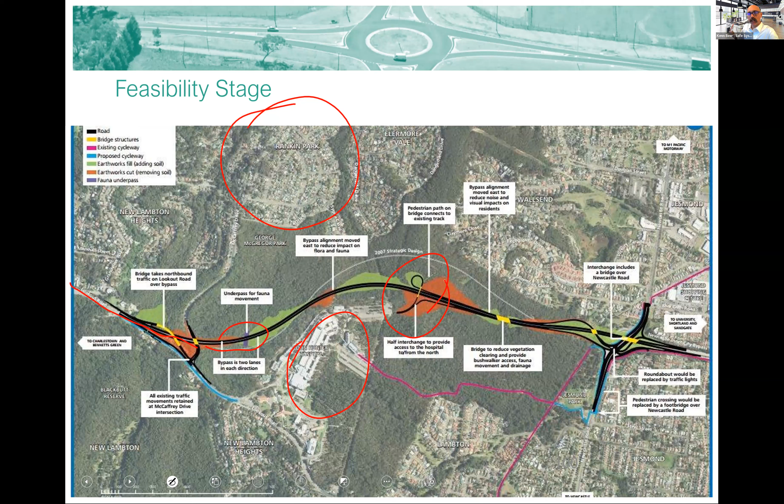Or, are we going to increase the speed vehicles come into a curve here? Or is this the appropriate intersection control? You know, how are cyclists going to move through it? Big picture sort of things to think about. You might get a bit more information, but you'd be thinking about, okay, well, how are vehicles now going to get from this side to this side? Where are they going to do U-turns? Are we going to change travel patterns and the like?

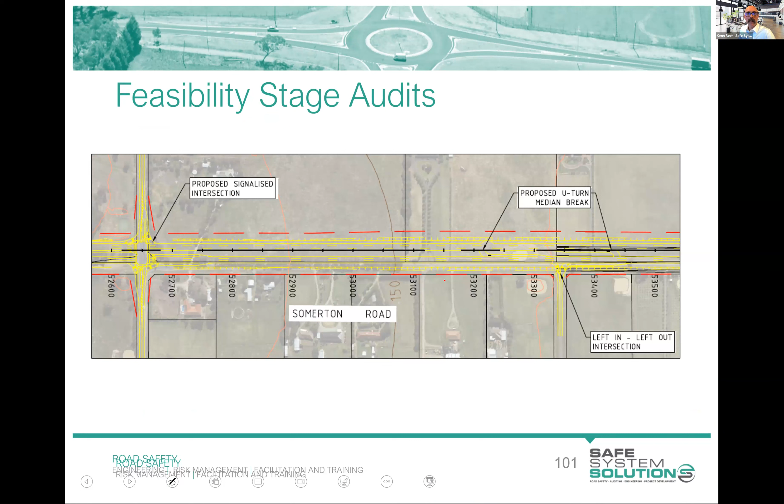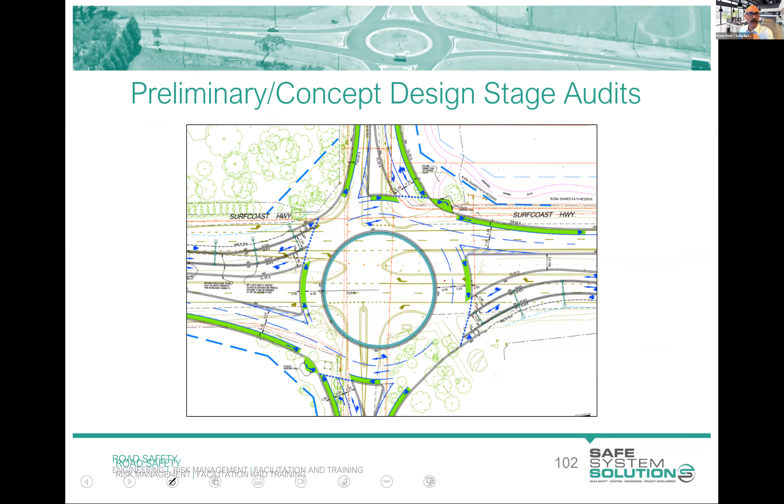Then you get a bit more meat on the design, and it could be on a survey base, it could be on an aerial image, and you're starting to get some ideas and you're looking at different things that could happen. Then you get into the detailed design audits, right? And this is where you get the full works.

You're going to get the long sections, the cross sections, you're going to get the pavement plans, the signs and line plans, signal phasing, and you've got to pore through all of this documentation to identify, okay, what are they going to build? And then what are the crashes that could happen as a result of them building this?

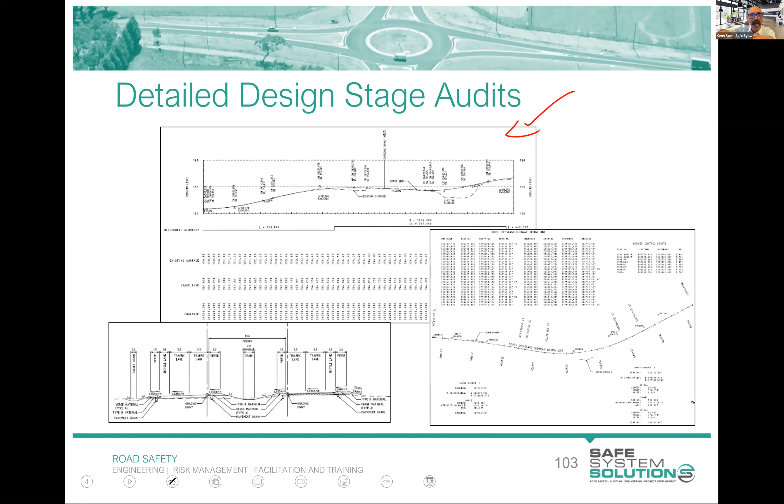And there's a lot of work and thinking to be done. And certainly if you're undertaking road safety audits at this stage, you've either got to be somebody who can look at this and really understand what's going on, or you've got to make sure that you've got that person in the team that can explain to you, okay, this is what this means. And then you can ask logical questions associated with that.

Are we going to divert vehicles through other areas, past a school or these unsafe areas? So you're thinking wider about safety than just absolute compliance with a code or a specification. You would look at that also, though. So I tend to say for these, it's big picture stuff. Big projects have big construction sites that usually get the road safety audit. The surveillance officers and others should be just checking, are the signs put out right? You don't need a full-blown road safety audit for that.

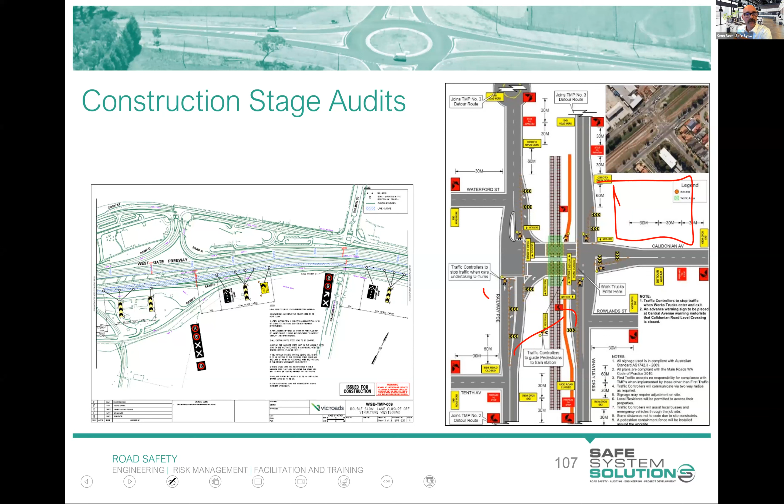Pre-opening is just before the ribbon's cut, and you're often checking height of installation of barriers. Did they put the RRPMs in the right place? They're the cat's eyes. Is the line marking right? Have they put the guideposts the right way around? They're not showing red in the wrong spot, those sorts of things.

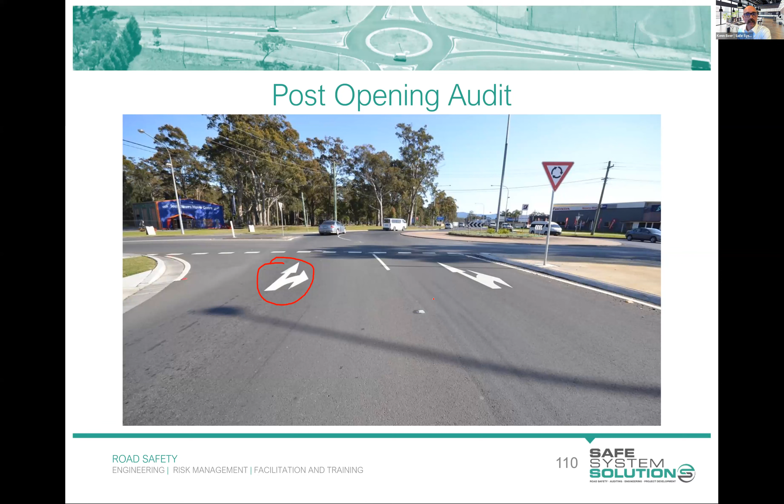And existing conditions are where you've got an existing road environment and you go and look and make your calls on what could cause crashes. Sometimes there have been crashes and you might have a look at those as well, but you're thinking about anything that could happen out there. And finally, we've got what we call a thematic audit. This is where we take a certain road user, we really hone in on that particular road user, and we take that road user through the site.

So if it's a cycling specific audit, we will ride the route and we'll have multiple people on bikes going through it. A walking audit, you will walk the route, and most of the time you walk the route anyway, but you'll also potentially have somebody in a wheelchair go through the route, and a motorcycle audit, you'll have somebody on a motorcycle go through the route. We think about these road users in all road safety audits, but you give it that extra attention in these thematic audits.

So questions come in. What's the timing threshold for post-opening versus existing road audits? Well, I can't give you a definitive 3 weeks after or 4 weeks after. It's in the general time frame after upgrades have been done. Existing ones, usually they haven't been touched for years, but I couldn't give you the specific timing of that.

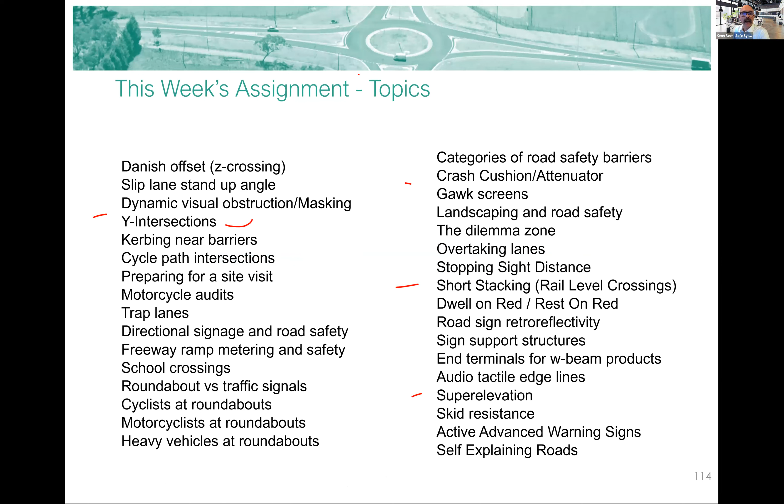Anyway, probably enough out of me. Over to Loretta, but do pop your questions into the chat. I rushed a little bit at the end, but I need Loretta to have time to give you an assignment, show you the learning management system, and a short little quiz that you're going to do as well as your assignment. Over to you, Loretta. Thank you. I'll just share my screen.

So what I'll do first is allocate everyone the assignment topic, just so that you can see that it's very random. So I've just popped in everyone's name. Hopefully you can see my screen there. Yes, I can see it. And you're going to do some random generation, are you? I am. We will email you your topic. So you don't need to write it down. I'm going to do two things after I generate your topic. I will email it to everyone, and I will also upload it in the LMS, which I'll run through after this. So I'll just quickly generate the topic so that you can see they're moving. And you can tell me when to stop.

Stop. All right. So these are the topics for everyone. I'm just going to take a copy of this and make sure we don't lose it. There's some great topics in there. Danish offset crossings. That's a beautiful one. If you have any trouble, like you can't find information on something, just email me. I'll point you at a ton of literature on them. All right, so I'll send through those topics that have been randomly selected.